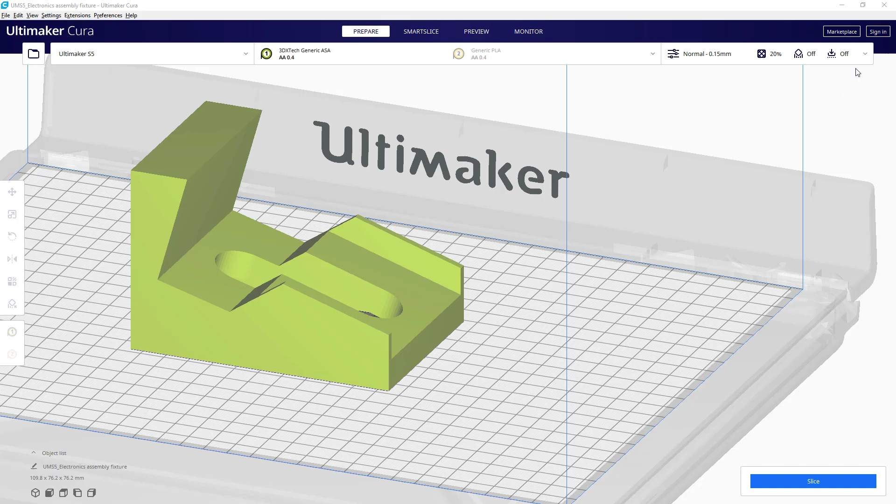Today, let's look at how to use SmartSlice to find the optimal print settings for your part. When it comes to FFF parts, it is no secret that there are a lot of print settings and that some of these settings have a significant effect on the strength and stiffness of the printed part. For any functional part, the question is, what do the print settings need to be in order to make sure the part is strong enough and stiff enough? Well, this is the fundamental problem that SmartSlice is designed to answer.

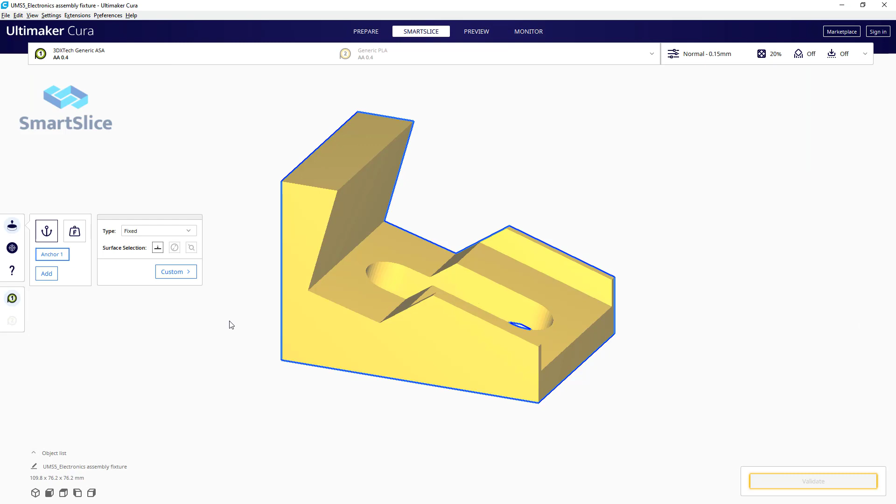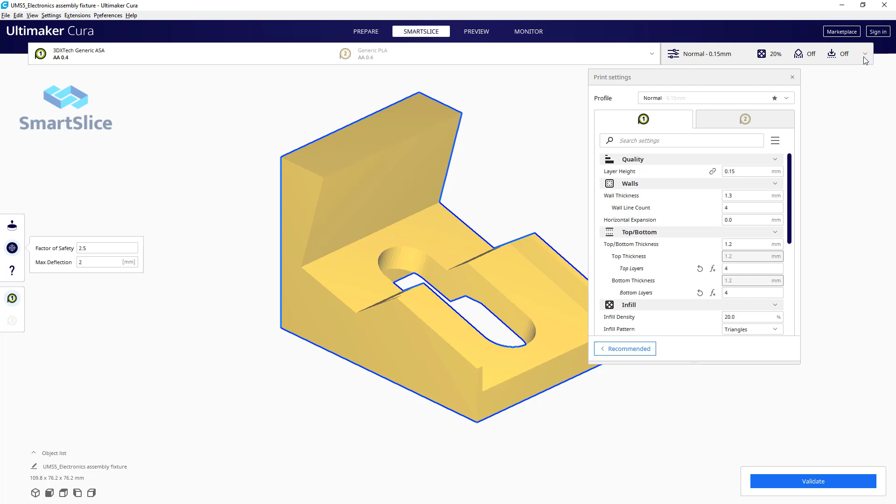The part we will use today is a manufacturing aid that you might find on an assembly line. First, I'll define the use case. The bottom is adhered to the workspace, so we can select it as the anchor surface. 3 loads are defined to represent the expected maximum loads applied when the part is in use. A factor of safety of 2.5 and a maximum deflection of 2 mm are defined as the strength and stiffness targets. For the print configuration, let's use ASA as the material and the print settings shown here.

Note there are 4 walls, 4 top and bottom layers, and 20% infill. I want to know what the preferred build orientation is, so I quickly ran the 3 orientations shown here through the SmartSlice validation tool. It is obvious that the side orientation is the strongest, so I'll use that going forward. I covered build orientations in more depth in a different video, so be sure to check that out.

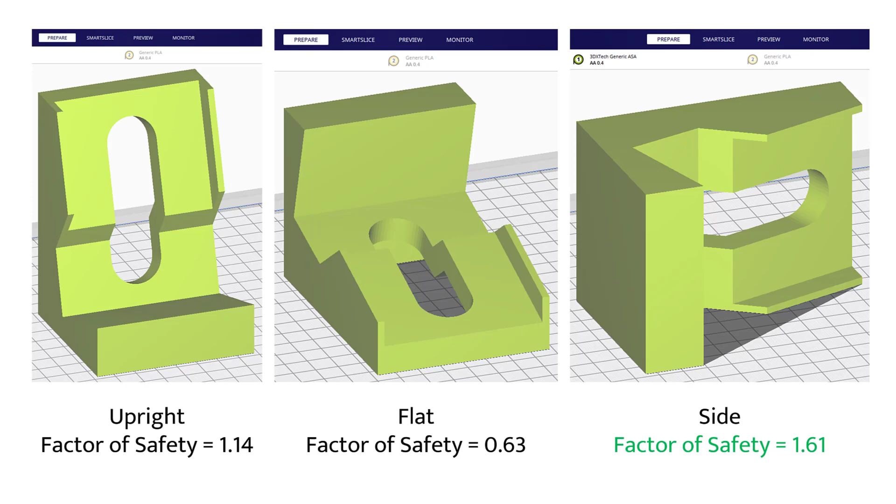If we look at the results from the SmartSlice validation, we see that the factor of safety is 1.61 and the max displacement is 1.55 mm. The part is stiff enough, but not strong enough. At this point, we have 2 options. We can manually adjust the print settings and continue running validations, or we can let SmartSlice optimize them for us.

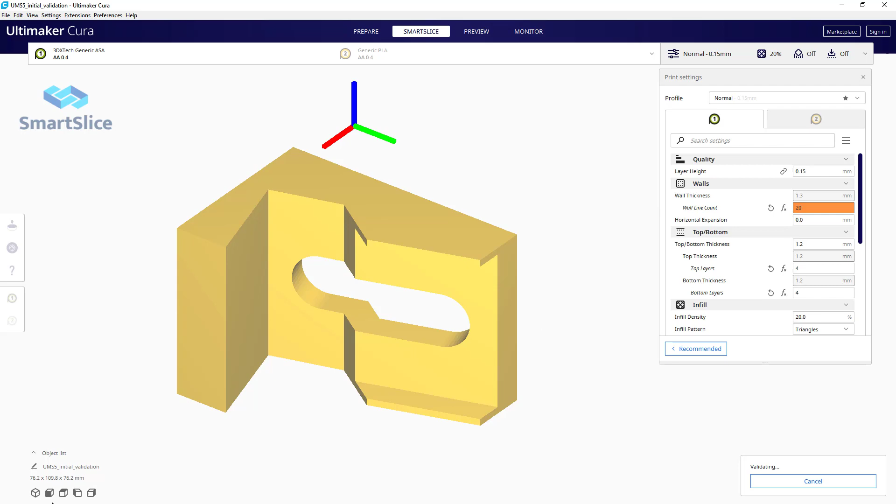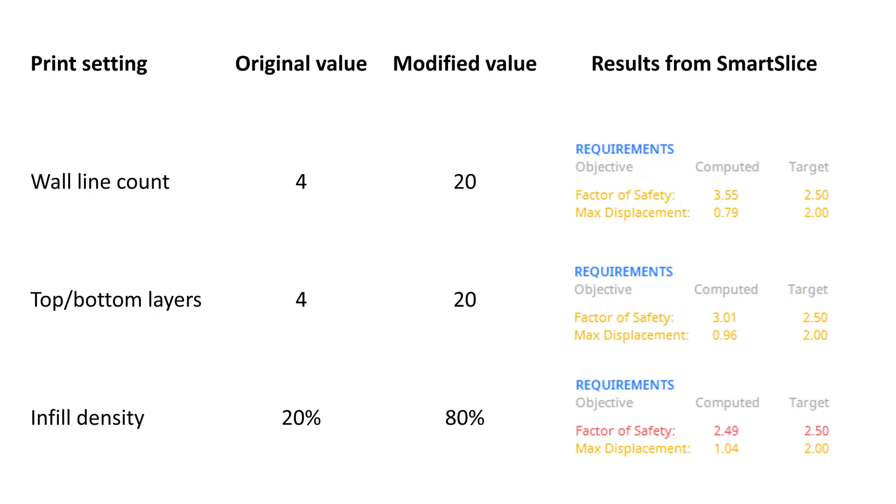First, I want to change a few individual print settings to discover what impact they have on the strength of the part. Here are the results from these validations. If I only increase the wall line count from 4 to 20, the factor of safety increases to 3.55. When I increase the number of top and bottom layers from 4 to 20, the factor of safety is 3.01. And when I increase the infill density from 20% to 80%, the factor of safety increases to 2.49, which is essentially at our target value of 2.5.

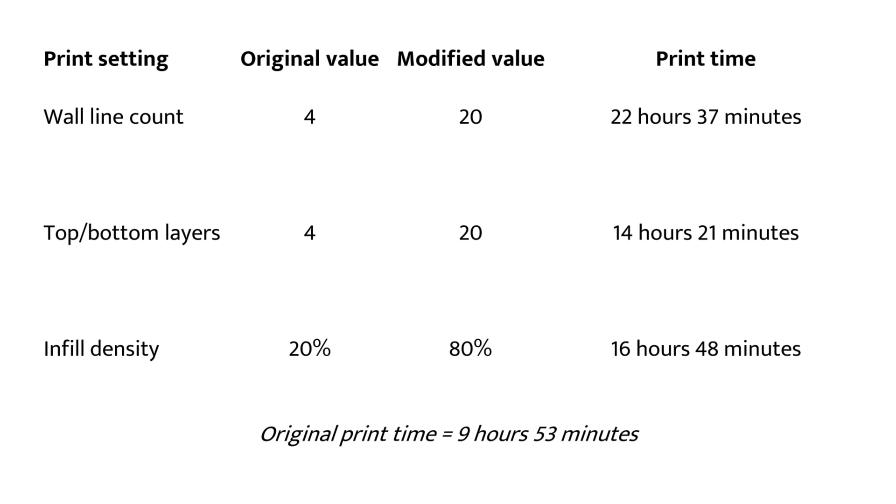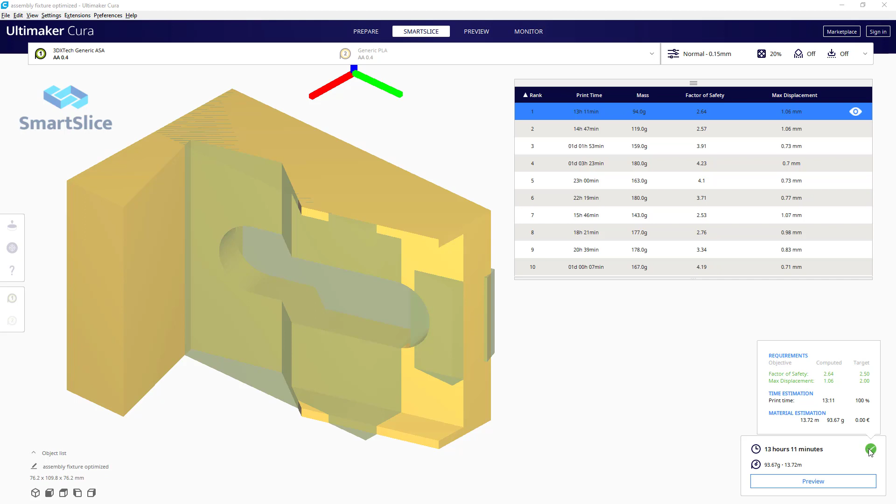The top result has the lowest print time. It uses modifier meshes to locally reinforce the part and place extra material only where it is needed. A look inside the part shows internal walls added as a result of the modifier meshes. The second result does not use modifier meshes, but it takes longer to print and uses more material than the first solution. All you need to do is select the configuration that you like the best and send it to your printer.

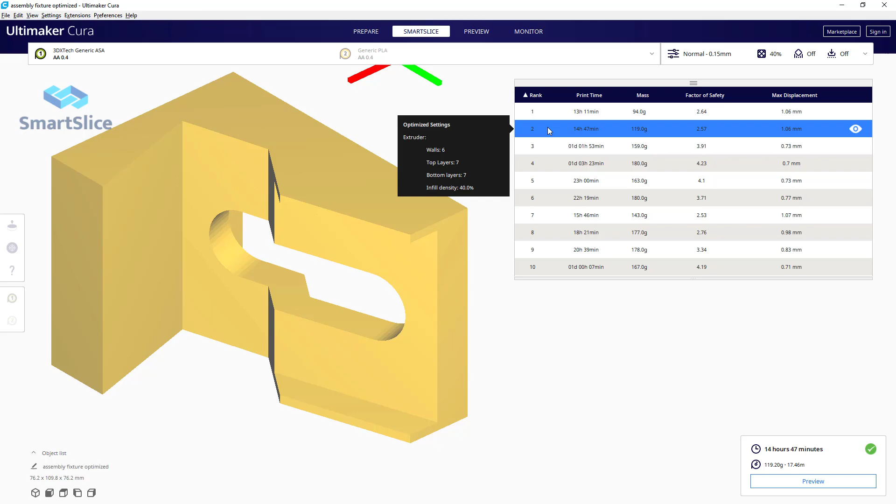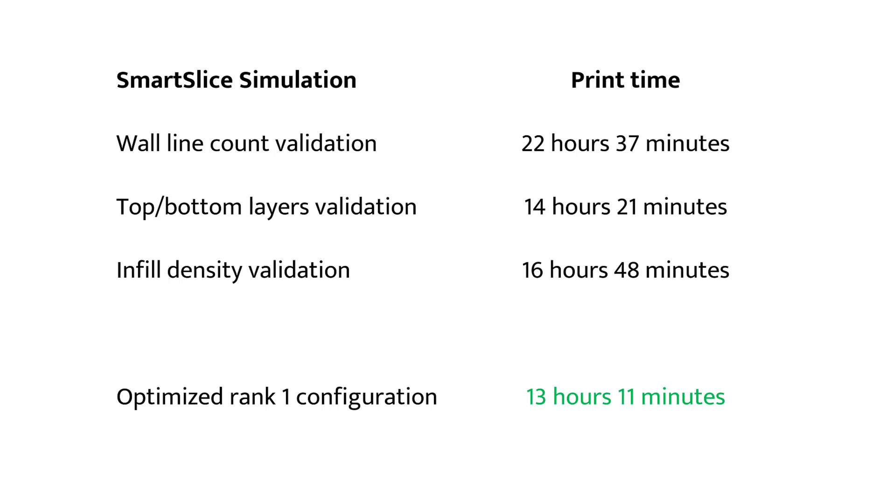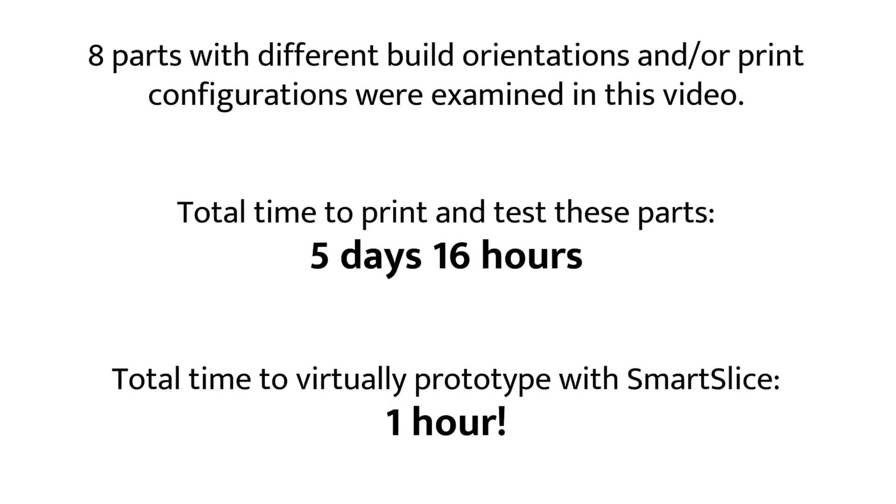Comparing the optimized and manually validated print times, we see that the optimized solution has the lowest print time by about 70 minutes. How much time would it take to do these iterations without SmartSlice? If you printed and tested the 8 configurations discussed in this video, it would take at least 5 days and 16 hours. With SmartSlice, running all these validations and the optimization takes less than 1 hour. It's time to let SmartSlice take the guesswork out of configuring your FFF parts and start printing with purpose.